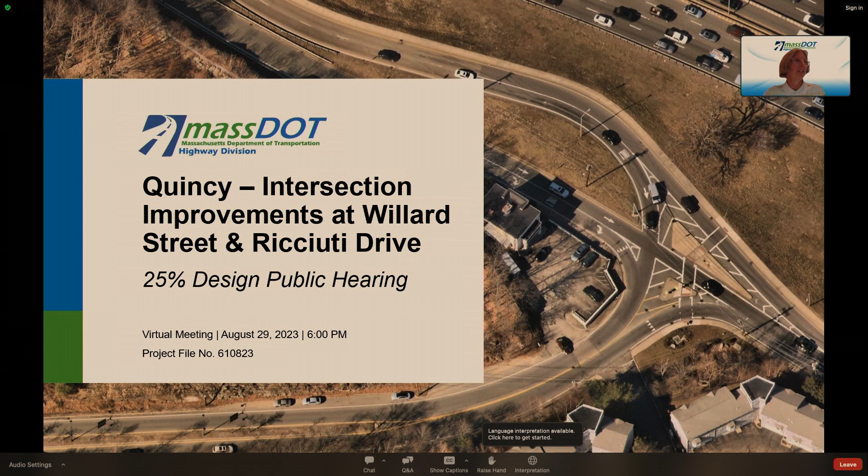Good evening and welcome. This evening, we will be presenting the proposed safety improvements at the I-93 southbound off-ramp, Exit 8 at Willard Street and Ricciuti Drive. My name is Kathy Doherty, and I'm a project manager for the proposed project.

I work in the project management section at the Massachusetts Department of Transportation Highway Division, headquartered in Boston. The purpose of this hearing is to provide a method for the Commonwealth to furnish to the public information concerning the state's highway construction proposals and to give every interested resident of the area an opportunity to be heard on the proposed project. Also, this hearing gives the Commonwealth an opportunity to receive information from local sources, which will be valuable to us in making decisions as the design progresses.

First, we would like to present some procedural elements of the design public hearing and review the functionality of the Zoom software. Kayla Sousa, who you heard from setting up the translators, one of our producers for this evening from the Massachusetts Department of Transportation Office of Operational Excellence, will present this information.

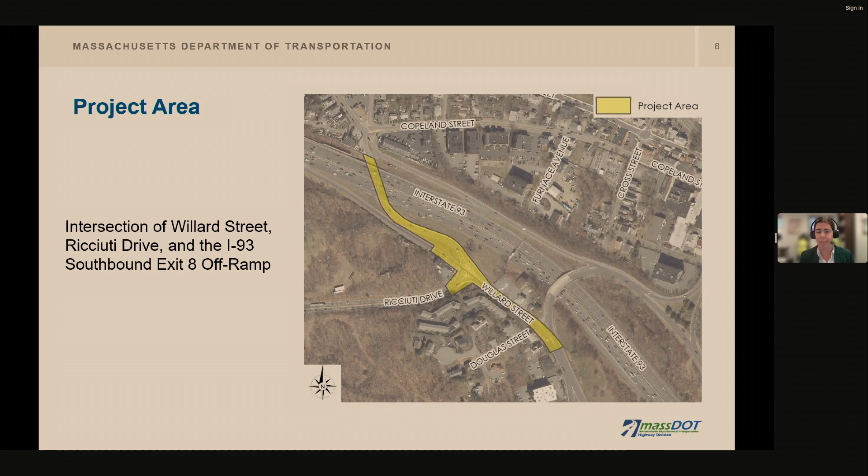As you can see in this graphic, the major focus of the study area is the intersection itself, but it does extend a bit north at the Copeland Street intersection, and further south where it ends at the limits of the Furnace Brook Rotary. The intersection provides access to and from the highway, as well as up Ricciuti Drive, which provides access to residential, commercial, and recreational land uses.

A little bit about the project timeline. This has been an effort ongoing for the past 4 years. In August 2019, we did initial analyses to support the fact that this reconstruction project would be viable. In 2019, we took a deeper look into the safety issues at this intersection with a road safety audit. In April 2020, the city

initiated a state project formally, and since that time we've been working and progressing forward the 25% design documents. We're here today to solicit public feedback. And with that, I'd like to introduce Matt Skelly from the Fuss & O'Neill project team to discuss the project more.

So I'm going to get into some of the technical details of this project, and what's really at the heart of it. What you all, surely folks in attendance tonight, are well aware of, is that this is a pretty dangerous intersection. We were out, as Ali mentioned, in 2019 conducting a road safety audit here, and we found a number of things that required addressing.

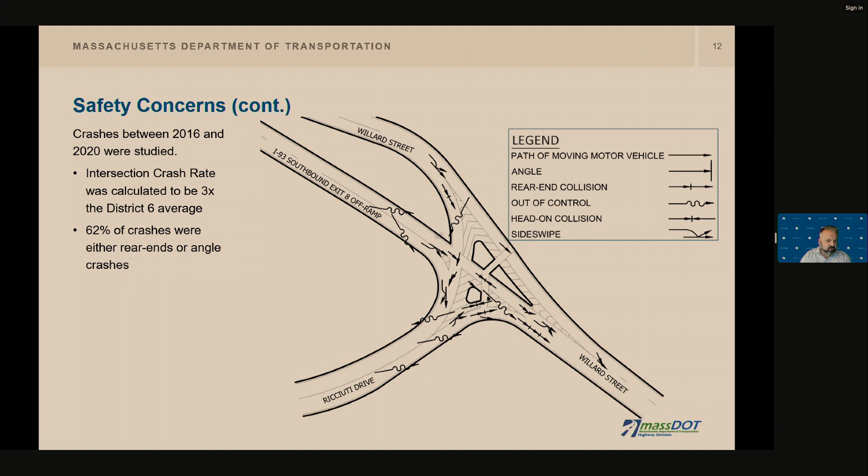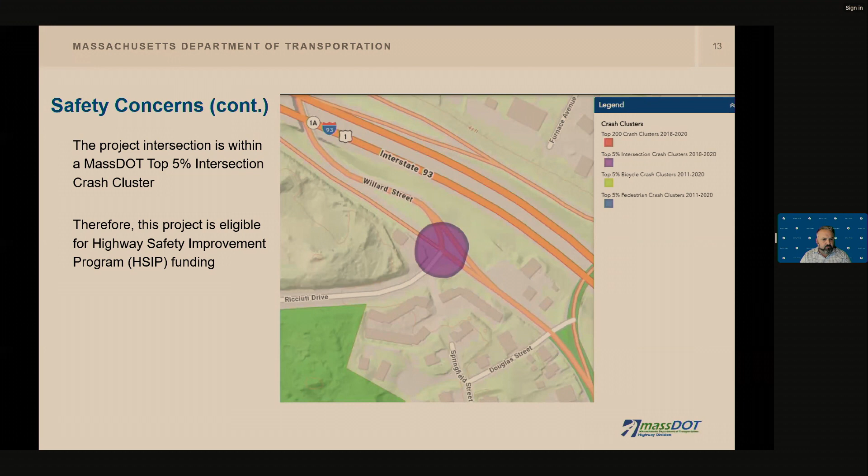injuries. Also on the crash front, this intersection is now in the top 5% of the state — statewide, top 5% highest crash clusters. So that's obviously pretty serious. This means the intersection is eligible for Highway Safety Improvement Program funding, and that actually was not the case in 2019 when we began looking at this intersection. So since we began studying it, the conditions have actually gotten worse crash-wise.

That's not to say safety is the only concern at this intersection. For folks familiar with it, this is also an intersection where if you're on Willard Street you can experience significant delays, especially during the afternoon peak hour when everybody's heading south to leave the city, using this off ramp, sometimes as a cut through to get back on 93 later. As all those trips stream down the off ramp, it's tough for folks on Willard Street to find a gap to break through. That can result in delays of up to 10 minutes per vehicle, with a lengthy queue stretching back to the Copeland Street intersection under the 93 underpass.

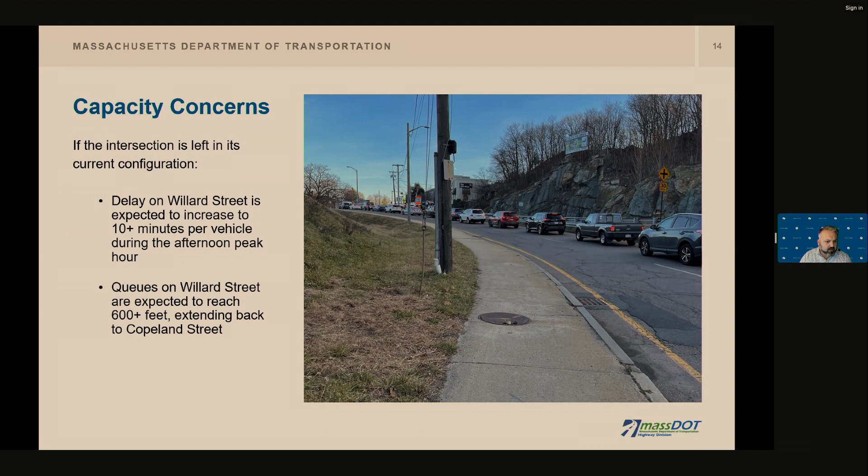So that's a good background on the problems, as I'm sure you're all well aware. What do we want to accomplish in this project? Number one goal is to improve safety for all roadway users - finding ways to reduce that crash history, especially those dangerous angle crashes, is a huge goal for this project.

We want to find a way to calm traffic so everybody moves through here a bit more slowly, improve ADA accessibility for pedestrians, make this a more comfortable place for bicyclists, find ways to improve sight distance where we can, and when we're done, leave this intersection with very clear signage and pavement markings so everyone understands what's going on.

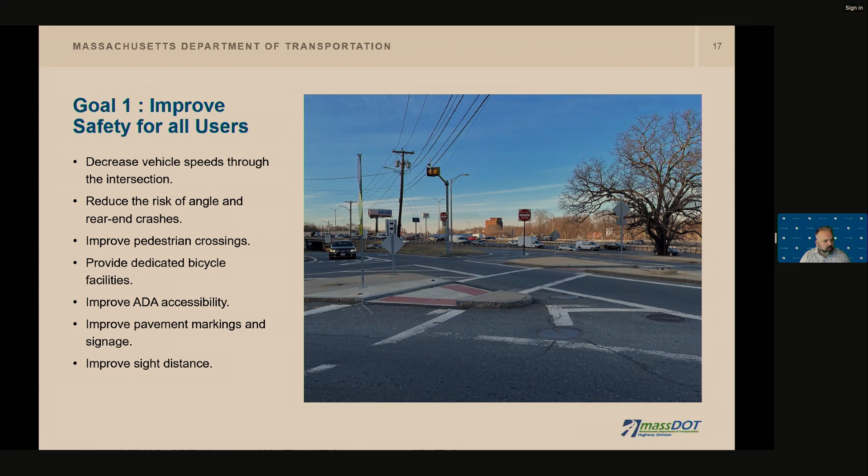While making those safety improvements, we also need to keep congestion concerns in mind. We want to make sure nothing we're doing makes congestion worse - in fact, we hope to make the congestion experience significantly better. It's important that folks don't have to wait in those lengthy queues on Willard Street, while also providing enough gaps in traffic for Ricciuti Drive to get out, all while managing that ramp traffic.

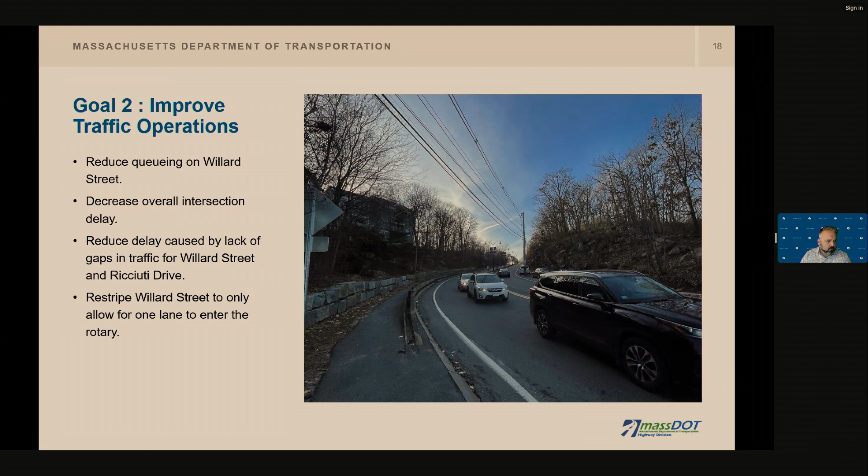When we looked at this, we considered a few different alternatives. The first one we thought of right off the bat was a roundabout - that's a popular new solution you see coming up in a lot of places, with huge safety benefits. We wanted to vet that through, and it turns out a roundabout isn't going to work here. The traffic volumes are unbalanced in such a way that no matter what you do, you'll never be able to find a gap in traffic for folks getting out of Ricciuti to enter the roundabout.

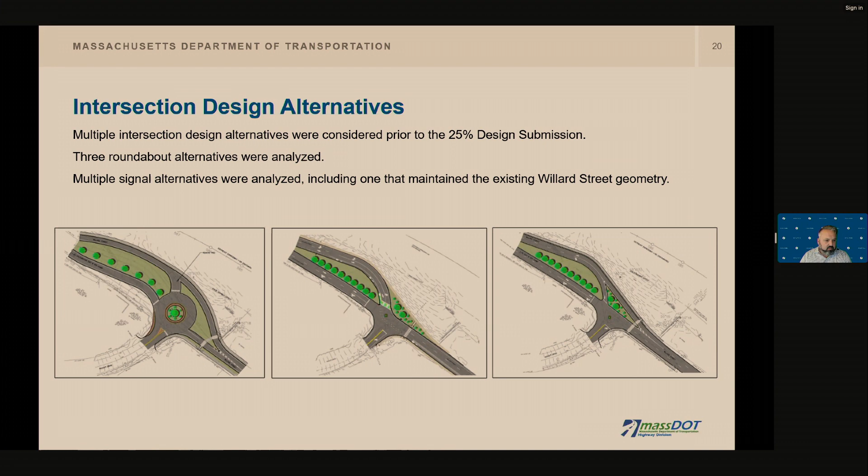So we were back to the drawing board a little bit. We looked at two other options shown on the center and right of your screen. The one on the right maintains that slip lane, we'll call it, for the through movement on Ricciuti, while the center option tees up the intersection a bit more and provides more dedicated facilities for bicyclists, making things make a little more sense for pedestrians. Those were our three concepts, and I'll turn it back to Catherine to talk about how they were advanced.

Thanks, Matt. Based on the three alternatives you just saw, those are the ones we explored for the purpose of this project. With a lot of vetting between the city and the state, we landed on what's shown on your screen right now, which is a signalized intersection that has new bike and pedestrian accommodations.

This signalization of the intersection will help decrease the speeds of those coming off I-93 onto Willard Street, and allow the Willard Street and Ricciuti Drive approaches to enter the flow of traffic without having to look for a gap. It'll provide a red light for the ramp, a green light for the side streets, giving everybody a sense of priority as they move through the intersection. Introducing signalization also gives us the option to create an exclusive pedestrian phase to minimize vehicle-pedestrian conflicts.

So traffic will get an all red all the way through the intersection, and pedestrians will be able to have new pedestrian heads on that signal equipment that will have a countdown timer that'll help them navigate the intersection more safely. And then, as Matt mentioned, one of the goals we set out on this project was to have

fresh pavement markings out here so that everyone understands exactly where they're supposed to be. So this entire intersection will be milled and overlaid, and new pavement striping will be implemented. In addition, we are proposing 5-foot bike lanes with painted buffers on Willard Street, and that will help cyclists navigate the intersection, as well as a two-stage turn box in the center of the intersection that I'll detail

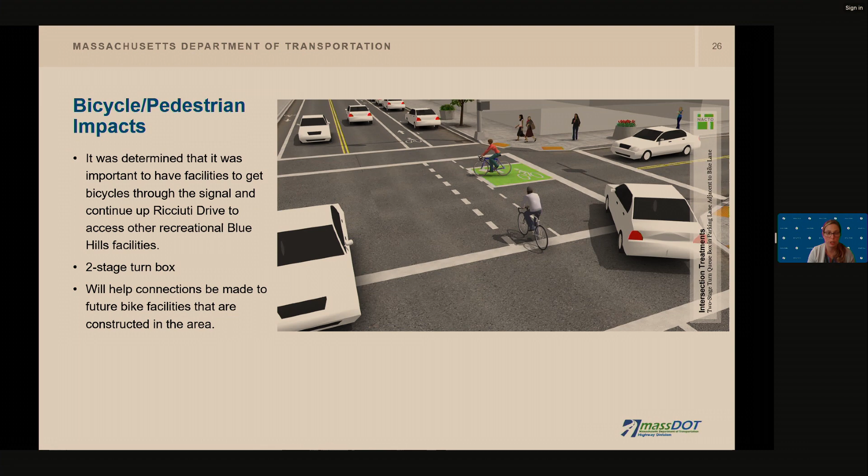So when we start to think about projects like this that are going to interrupt an entire intersection, we often think, well, what's going to happen during construction? Because that is usually the most intrusive time. So as we move through that process, we are still, as Kathy has mentioned, in the early stages of design, but we know that we are going to need temporary lane closures as part of this project, as well as temporary pedestrian detours. We are confident that residential and business access will be maintained throughout construction. And we will of course be in coordination with emergency responders, both locally and regionally, in order to make sure that they have full access to this area as needed.

So next steps as we move through, tonight we are at August 29th. Our design public hearing is this evening. From this point, we will be internalizing your comments and moving forward with our 75% design through November of this year. After that, we will go through 2 more design phases to get us into final design, scheduled right now to happen in May of 2025. Based on that process, we will be able to outline when construction funding will be allocated to this project.

And be able to schedule an advertisement date. With that, I would like to pass it back to Kathy and the MassDOT team to outline how properties will be impacted as part of this project.

Thanks, Catherine. Now we would like to hear from Mark Hicks. As you may recall, Mark is from the MassDOT Right-of-Way Office. Thank you, Kathy. Hi, my name is Mark Hicks. The Right-of-Way Bureau is responsible for acquiring all necessary rights in private and public lands for the design, construction, and the implementation of this project.

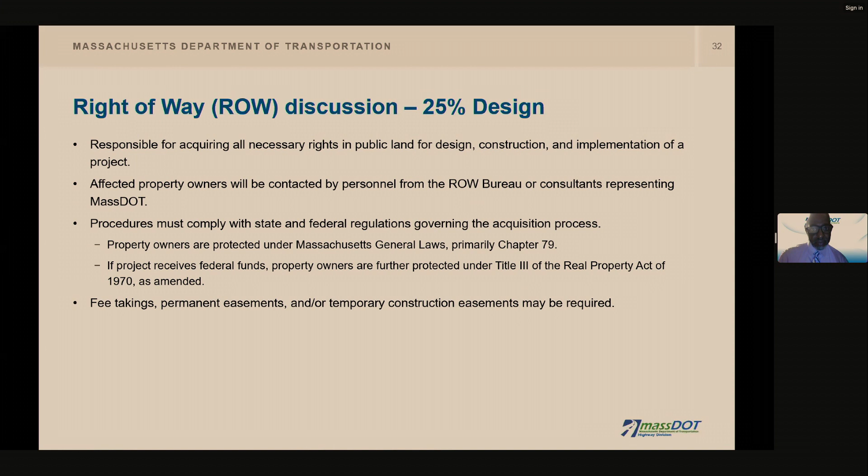Thank you, and back to you, Kathy. Thanks, Mark. As stated previously, the purpose of this hearing is to solicit your input regarding this project. As the plans are not yet complete, we may not be able to answer all of your questions or respond to all of your comments at this time.

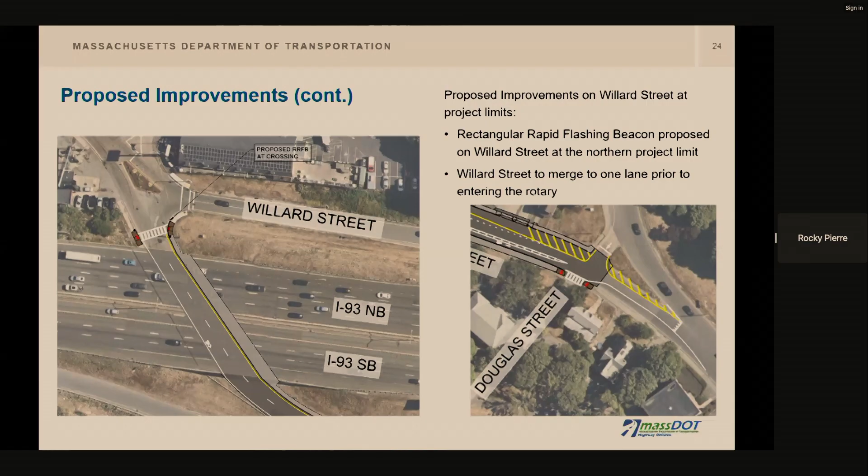So that pedestrians, cyclists, and drivers can see... you see where the turn arrow is? That's an island. It doesn't really tell the drivers coming from the highway that, oh, okay, there's a bike coming right here. I think there should be also...

Going into the comments from Irene Lutz, going down by Douglas Street, I think bollards in that area will do a better job, especially knowing how bad traffic is in the afternoon. A lot of drivers are gonna try to take advantage of that back lane to go around other cars. That's all I have for comments. Thank you.

Thanks, Rocky. I think those are really helpful comments. We will take a look at how to highlight that two-stage turn box at the intersection, as well as making sure we have some safety precautions for cyclists as they approach that roundabout on the south side of the project limit and coming towards Furnace Brook Parkway.

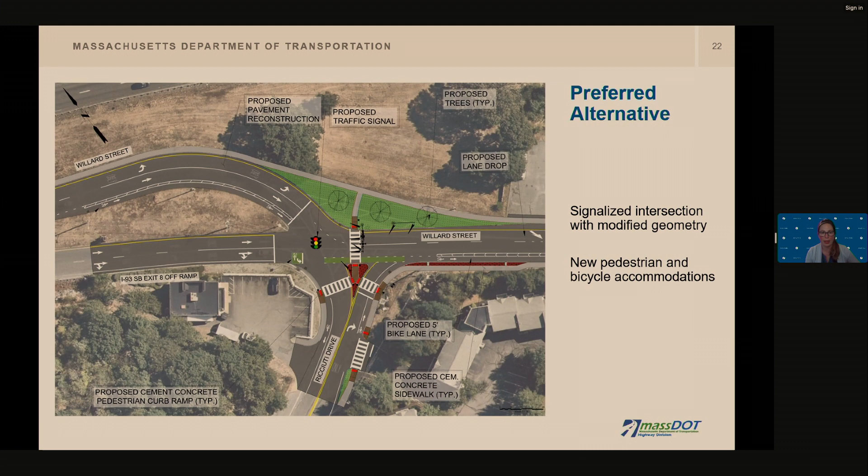The temporary signal is under consideration with the district at MassDOT District 6 at the moment. We don't have an immediate schedule for when that will be implemented. Going back to the advertisement, Connor, can you flip back a couple slides to note where else this meeting was advertised? Elliot, I think that might answer the latter part or the beginning part of your question.

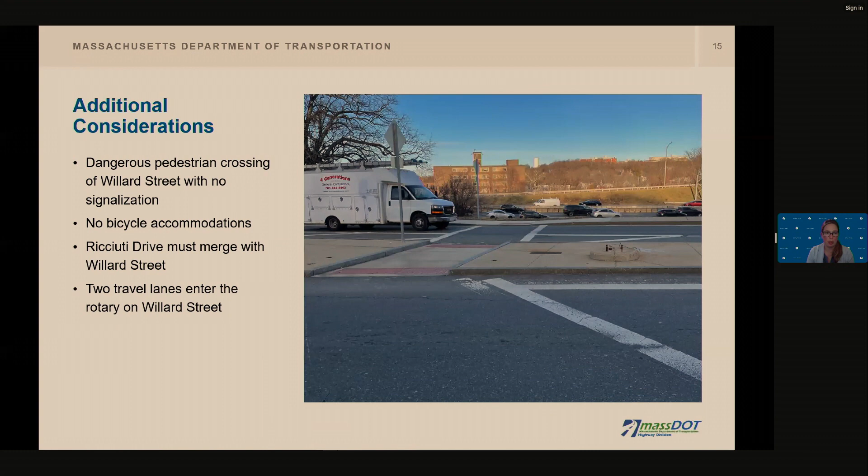Okay, I know my wife picked up the Quincy Sun. Yes, but it was advertised in the Sun as well as the Patriot Ledger. It was advertised also on MassDOT's Facebook and Twitter. The city of Quincy had it on their website as well as in several other locations for people to access.

Well, I would think where we have so many people between the Quarry Hills and the golf course, Granite Links, that if these people were notified, I think you would have a lot more people in attendance because it's obviously a major concern.

The other thing is, if they considered temporarily putting in speed bumps - I know when I come off the ramp to cross over to go to Quarry Hills up Ricciuti Drive, there are people that don't like to wait in line, and they cut around, and they actually cut more people off. If they could put in a Jersey barrier over there so nobody could cross over unless they were in that right lane turn only, it would make life a lot easier. I sit there sometimes and wonder if somebody's going to get out there and start a major fight. It gets very serious when you're back down to the bottom of the hill, and somebody just comes streaming by and decides to cut off everybody. It's just aggravating more people, exacerbating the situation of people who think they're more important than somebody else and don't have to wait in line.

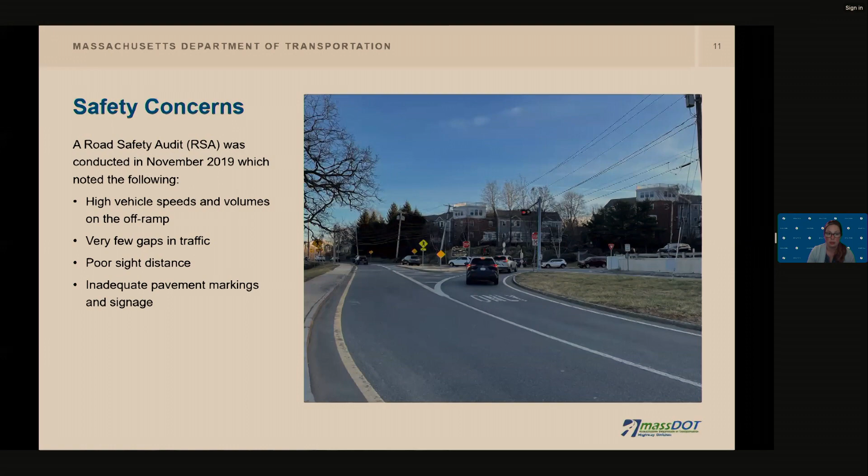Sure. That's probably one of the best parts of this proposed design, is that simply putting a traffic signal there helps all traffic on every approach, especially Willard Street and Ricciuti Drive. As I mentioned, one of the important parts here is that we can't allow any queuing to back up on 93. But letting some of the cars on that off-ramp come to a stop and begin to queue up there allows more than enough gaps for folks to get across. So that is definitely a big plus from this design.

Awesome. Thank you, Alan, for your comment, and thanks, Matt. Our next one is from Irene Lutz.

It says there are no bicycle connections to the Copeland-Willard intersection from Ricciuti, and so bicyclists are required to travel far out of their way to navigate the rotary. Can contraflow access be provided by widening the sidewalk into a shared use path? Please note that bicycling on sidewalks is prohibited by ordinance through Quincy.

Thank you, Irene. We are aware of that ordinance. Again, I think this is something that we can take into consideration with a larger project for the city. Our project limits are confined here to the intersection, up to the Copeland intersection and down to Douglas Street as shown on this image. But I think the city has plans to carry this forward in the future in order to create some more connectivity.

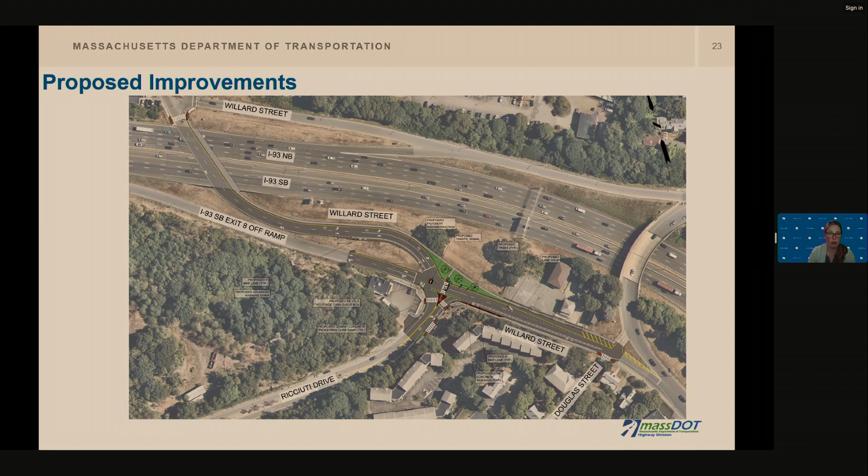We do not have any raised hands at this time. This is Kathy, to expand on Catherine's answer: the transcript from the stenographer will be available on the MassDOT website at a later date. Also, the presentation will be available on the MassDOT website as well as the City of Quincy website.

I think we've finally answered everybody's questions. I don't see anything in the chat, or any hands raised. Very good.